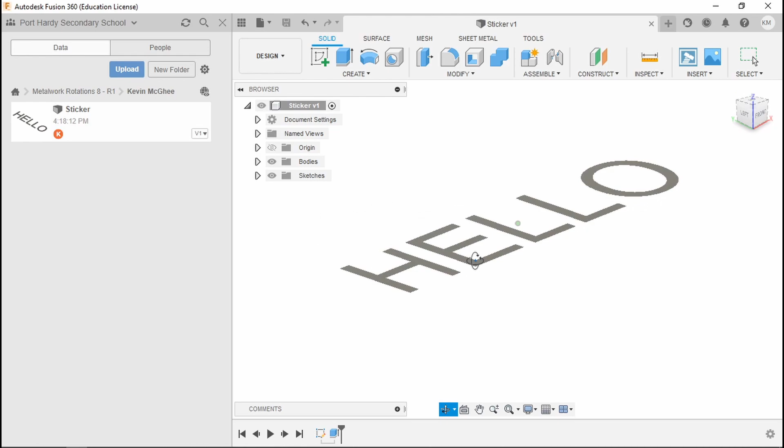So the first thing we want to do is make sure we have it saved. So we want to make sure that we've saved it in our folder. In this case, Metalwork Rotations 8 in my folder. I'm going to hit save, call it sticker. And for a sticker, it doesn't matter what thickness you extrude it to, you just want it to look close. So I've extruded it to about 5/1000ths of an inch, something like that.

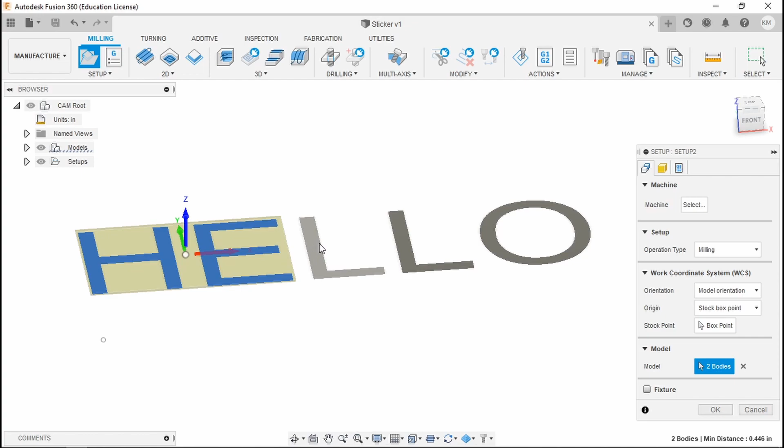Okay, so in order to turn this into a sticker, we have to go into the manufacture workspace. We're going to click design. We're going to come down to manufacture. So the first thing we need to do is create a new setup. So I'm going to come up here and click setup, and even though it shows material around the 2 letters here, it says model nothing over here. So let's click on, now it's blue, which means we can select, and let's just select all of our pieces just to make sure everything works the way it should.

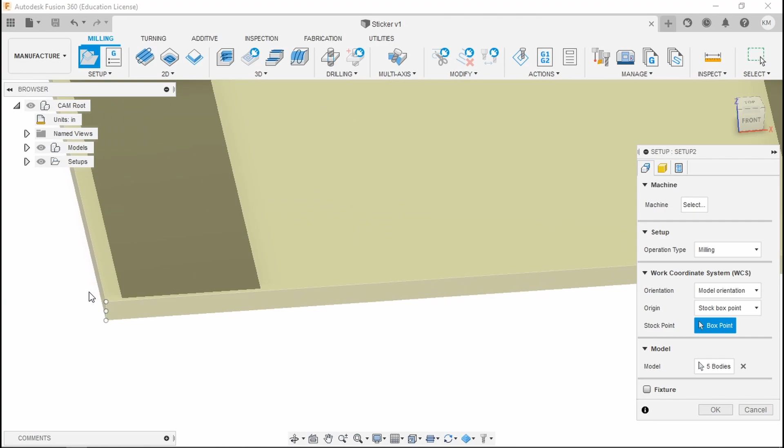And then the other thing we want to do is set our work coordinate system to the lower left corner. So we're going to click box point, and we're just going to come down and click on this top little corner point. We can scroll in if we want to make sure we get the exact perfect one. And then it moves down there. And all we have to do is hit OK. And that's all we have to do for our material setup.

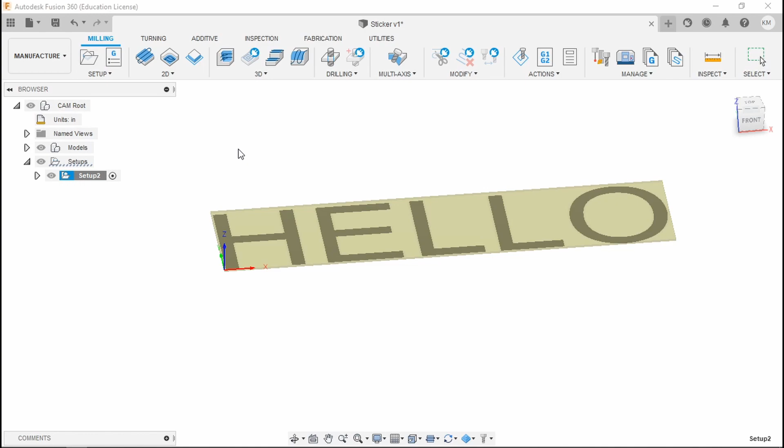And if we click and expand our setup, we can expand and close our setups folder. There's nothing below it yet because we haven't created a toolpath, which we're going to do right now. So we're going to right click, and we're going to go create from template, and we want vinyl cutter. Now I've already got vinyl cutter here because I recently used it, but if you don't, you're going to come down to select template, and then a window is going to show up, look like this.

You're going to scroll down. First of all, you're going to make sure that you expand your cloud. So expand the cloud. We're going to scroll down until we get to vinyl sign cutter. Click on it, and there's our vinyl cutter path. So we're going to left click on it and hit select. And now our setup folder here, yours will probably say setup 1. Mine says setup 2 only because I was just playing with some stuff before I started recording.

So we have this 2D profile. This is the sticker toolpath. Don't worry that it doesn't say vinyl cutter, it's just the way it is. Now we got a red balloon here that says no toolpath, so we need to tell it where to cut. So we're going to right click, and we're going to edit the very top. We're going to click on geometry, and right now contour selection is highlighted blue, but it has nothing.

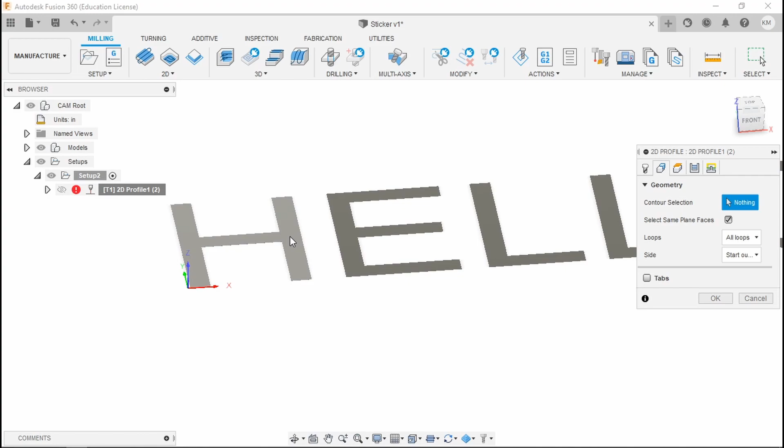So what we want to do is we want to click on, and we want to make sure select same plane faces is checked, because if that's selected and we click in the middle here somewhere of one of our letters, it will recognize all of them in most cases, and everything is going to be good, and we could hit OK. The other option is if you're not getting everything selected, just pick the edges of each one, and that will also work.

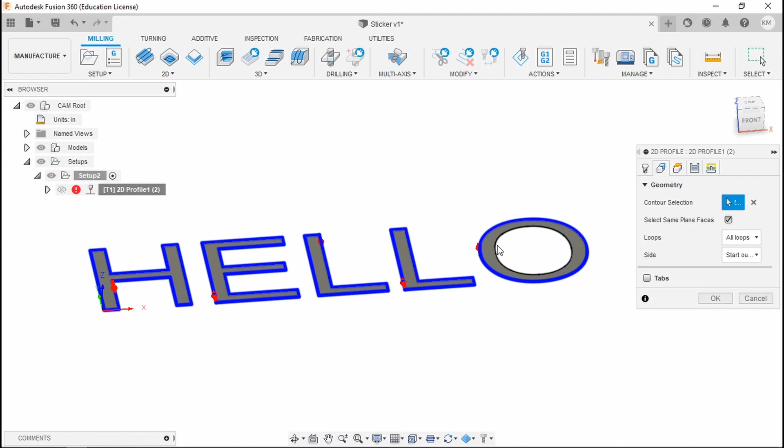Either way is fine, and we're going to hit OK. And then we got 36, 83, 100% in the corner here, and there's our tool path. So our tool is going to cut on the blue lines, and it's going to move on the yellow lines. So we'll hit save just to continue. Don't worry about the user save, just hit OK.

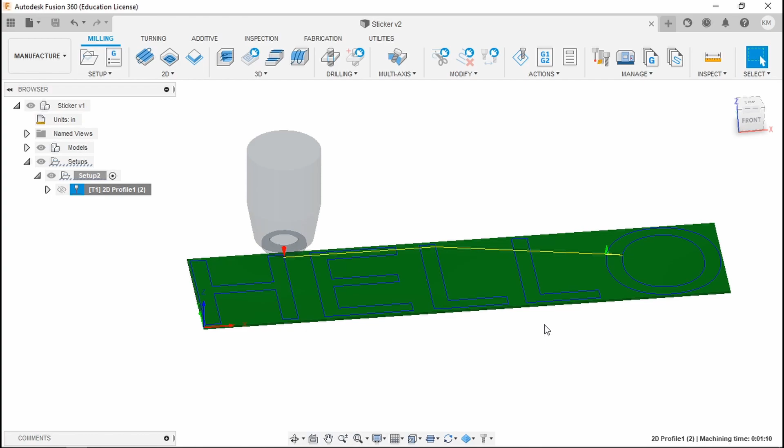And now it's time to post it out. Posting is when you convert this graphic interface into computer code that the machine can use. So what we're going to do is right click on 2D profile, and click on post process. So this is the new post process window as of September 2021 when I'm recording this video. And we have to do a couple of things to make sure we can cut a vinyl sticker.

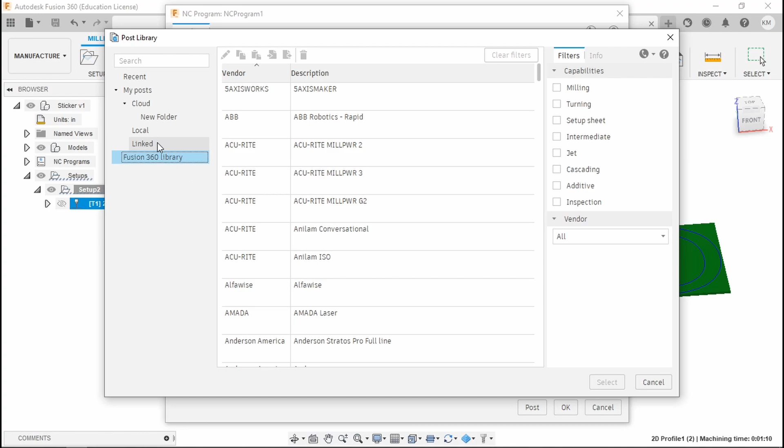So the first thing is we need to select the proper post processor. Now I've already played around with it and I have mine here, but all you have to do is just choose from library. And what you want to do is go to cloud, and you should see my 3 posts here. One for Tormach, which is the mill, one for the Torchmate, which is for plasma, and the Autodesk vinyl cutter, which will output an AutoCAD DXF. So we're going to click on the Autodesk one and hit select.

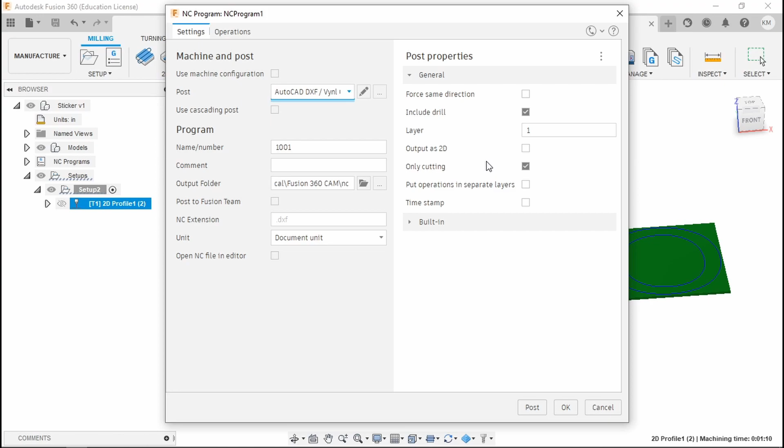And then what we want to do is make sure that this box here, only cutting, is checkmarked. As I was playing around with it before, it is checked, but it probably won't be checked. Remember these yellow lines here? We don't want to output those for a sticker. So if we put only cutting lines, it won't show those.

We're going to name it, and we're going to call it my first correction. We'll use our name. So McGhee sticker. Now we're going to output folder. Normally we would have to output it to the computer, but what's new here is we can post to the Fusion team, which is what we're going to do. So we're going to check it, and then it wants a Fusion team output folder. So yours will be blank right now. Mine says stickers because, again, I was playing around with some stuff before recording.

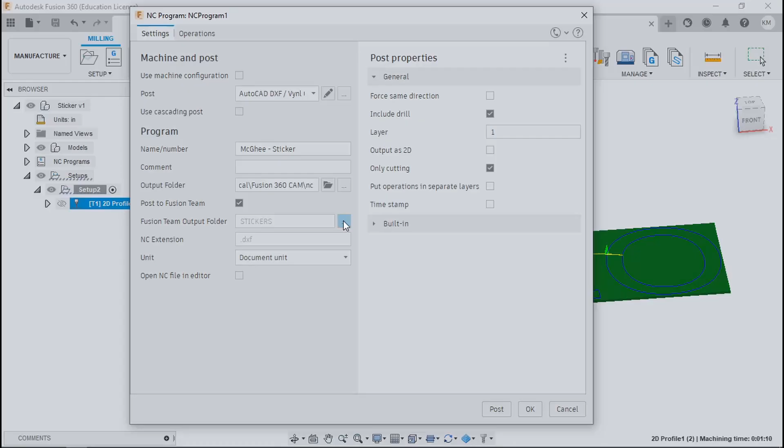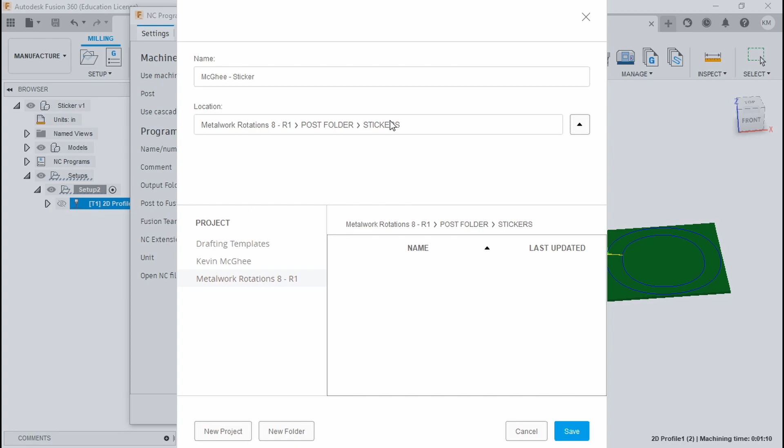So we're just going to set this up, and you only have to do this once. So we're going to click the 3 dots, and then we're going to click a location. So I'm going to click the down arrow. I'm going to double click on the Rotations 8 up here, and we have all of our student folders, and we're going to scroll down until we find the post folder, and we're going to click on stickers, and that's where we're going to save it. So now it should say Metalwork Rotations 8 R1 post folder, stickers, and there we go. So we're going to hit save.

So now we have output folder, stickers, DXF, document, everything else is fine. So we're going to hit post, and it's going to post our file. So here we go, McGhee sticker.dxf status. It's going to slowly fill up, complete, and it's going to open up this window, which we don't want. So we're just going to

close it. Hit close. And if we go to show data panel, rotations, post folder, stickers, there we go. So we've got our sticker. And don't worry about this, if you see that, it goes away after a little bit. And that is how you output a sticker.